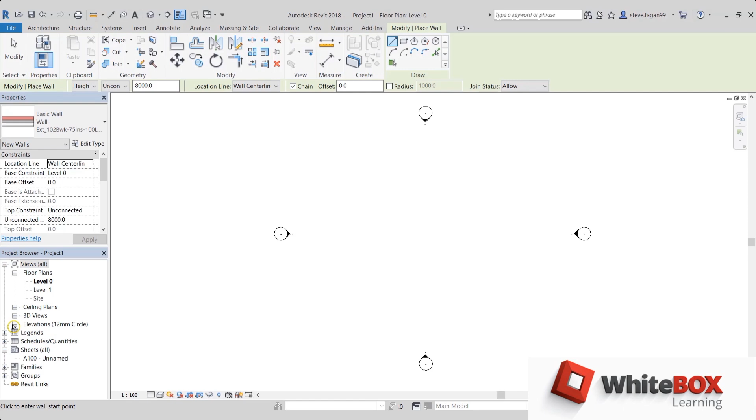We must then specify which level the wall is going to be constrained to. So at the moment we only have level 0 as our base constraint, and level 1 is our next level up. So to get a good view of what I'm about to do, I'm going to open up an elevation view. In the project browser we have our elevations heading. If we click on the expansion button there, we have our east elevation. So if we double click on that, that opens up our east elevation.

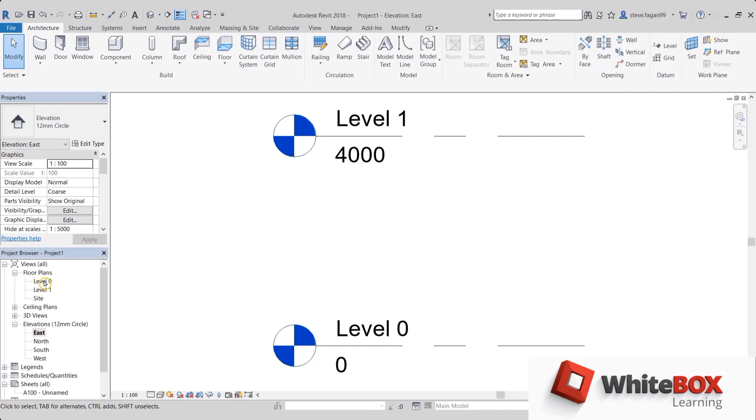Here we have our level 0, which we see in our floor plans, and our level 1, again, it's in our floor plans in the project browser. So if we go back to our level 0, I would like to have both of those views open at the same time. So in order to do that, I'm going to type in WT, which stands for window tile, and by doing that it's going to open up both views on the screen. So type in WT.

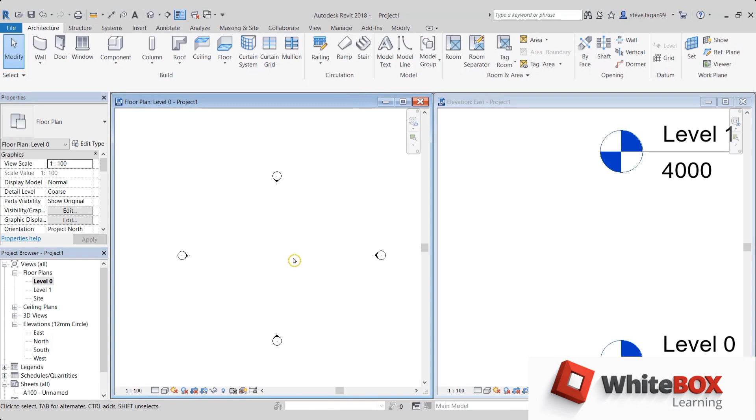Here on the left hand side we have our floor plan level 0, and on the right hand side we have our east elevation. So making sure that our level 0 is active, by simply clicking on the tile, we'll now go back to the wall tool. I'm going to be using my draw by line from the draw panel, and now getting onto the options bar. So the first option here, it says height. It may say depth on yours, but if I hit the drop down arrow, we can go between the two.

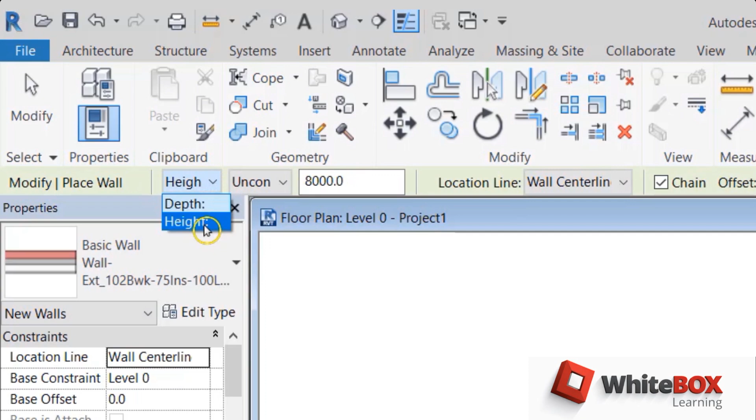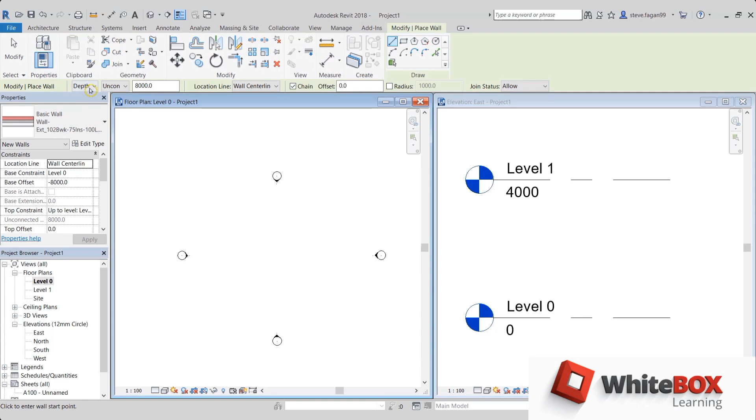So whether we draw by height or by depth simply means that as we're drawing currently on level 0, if I have height selected, my base level will be constrained to level 0, so my wall will go above level 0 and connect to level 1. If I change over to depth, my wall will be constrained at level 0 and go below my level 0. So that's the difference between the height and the depth. Next, once we've specified that, we're going to use height.

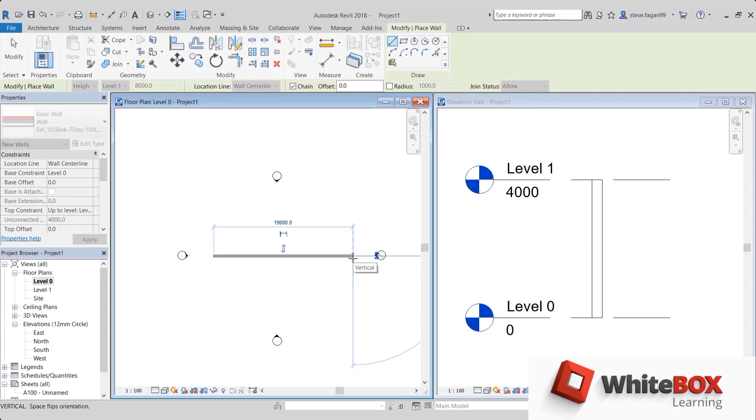We'll then select the next option, which is where we want to constrain it to. So we're currently on level 0, so our next level is level 1. So we constrain it to level 1, and draw our wall. There you'll see on the right hand side in our east elevation, our wall's base constraint is level 0 and its top constraint is level 1. If I go to my east elevation, select my level, and change the level, the wall, because it's been constrained to that level, will move with the level.

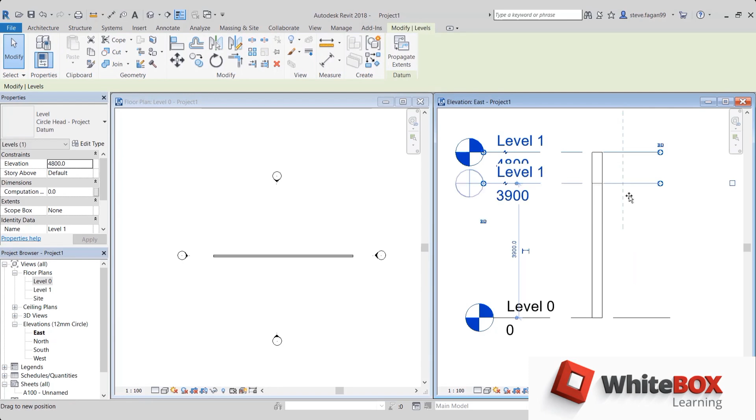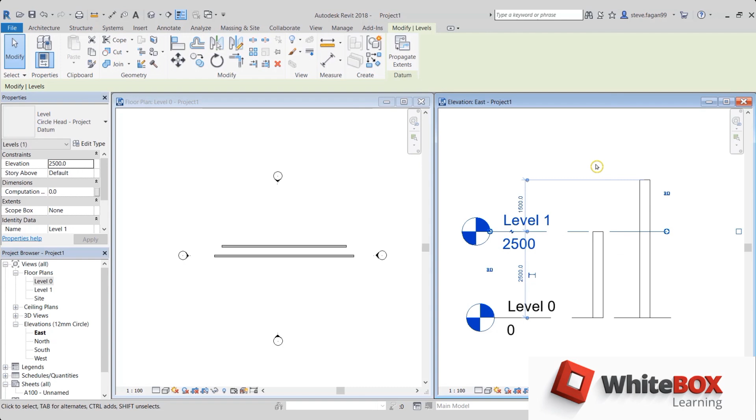If I select unconnected, I'm then able to specify a height. So if I give this a height of 4000 and draw my wall, you'll notice on the east elevation there's my wall, base constraint level 0, unconnected with a height of 4000. So if I change my first floor level, because the wall is not constrained to that level, the height doesn't change. So now we just want to have our level 0 open. If we double tap on the top of the window tile, it'll bring us back into our level 0.

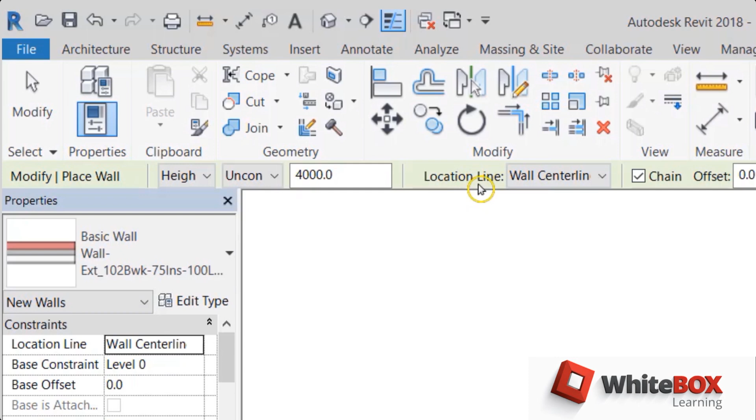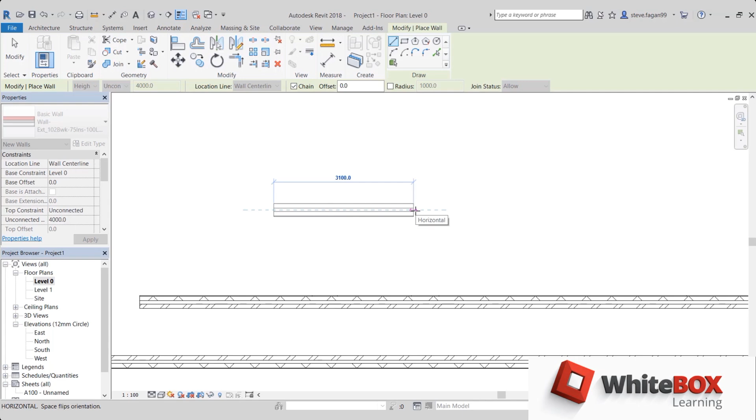For the next option, which is the location line, I'm going to change my detail level to medium. So come down here to the view controls and select medium. If we hit the drop down arrow, you can see we have 6 different options. With the first, which is the wall center line, I'm going to zoom in using my scroll wheel. When I click to start and move my cursor in the direction I want to draw my wall, you'll notice in the center there's a dashed light blue line. That is my location line. And as it's set to wall center line, it's at the center point of that wall.

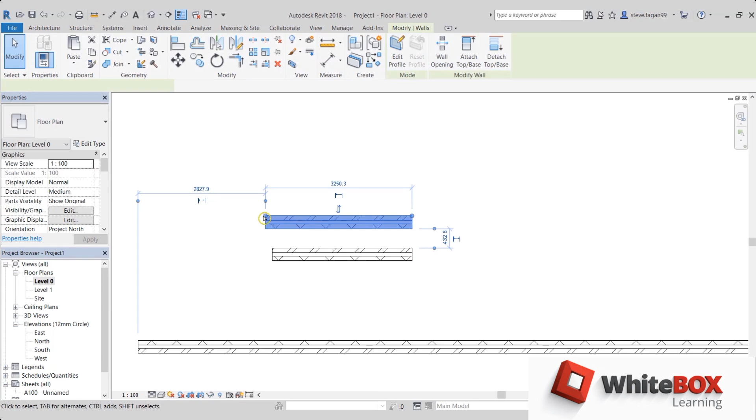It's also represented by the blue grips either side. So if I change it to finish face exterior, when I draw my wall, the dashed blue line is on the outer face of my wall, again represented by the blue grips either side.

As well, we have finish face interior. So there's our dashed blue line on the inner face, so it's running along the plasterboard of the wall. Again, blue grips either side.

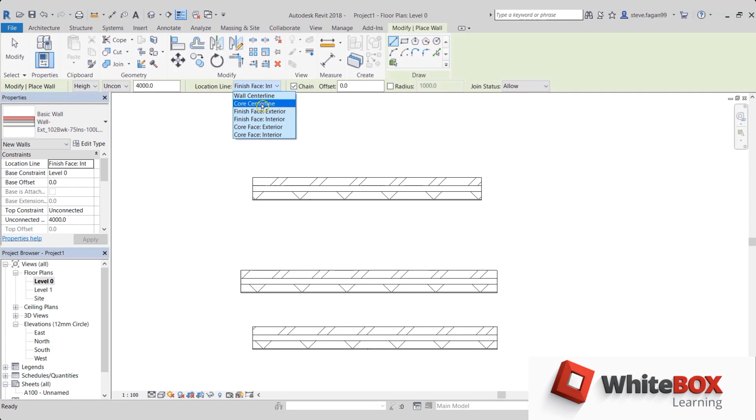The other options which we have are core centerline, core face exterior, and core face interior. What they're referring to as the core is when we create a wall, we must specify what the core of that wall is. The core is generally the structural part of your component. So the blockwork here would be the core of our wall.

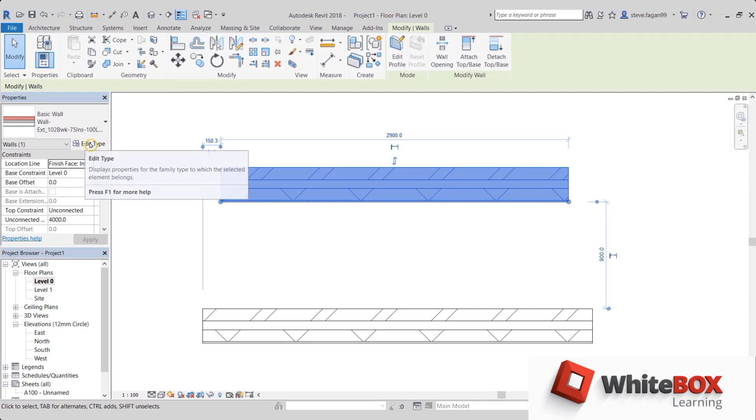To show you how that's represented, I'm going to select it. I'm going to go to Edit Type and edit the structure and show preview. Don't worry about what I've just done. We'll go into a lot more detail about this in a later video. But for now, I'm just going to show you this as a small preview so you have a better understanding about what a core boundary is.

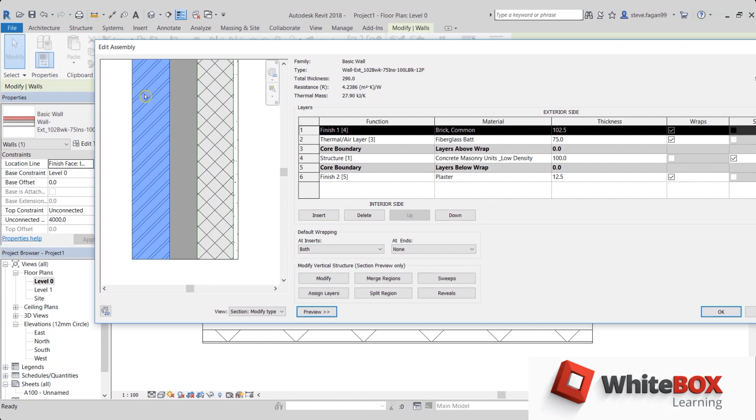So here is a section view of the wall which has been created. There's our brickwork, which is represented here. Next is the insulation. There's our concrete block and our plasterboard finish. And you'll notice on either side of our concrete block, we have our core boundaries. So this here is our exterior core boundary, this blue line here. And here's our internal core boundary, which is this blue line here.

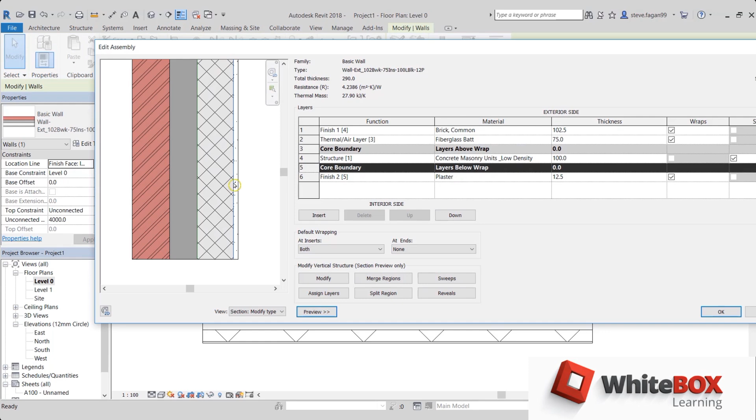So the purpose of creating the core boundaries is when we have two intersecting walls, you'll notice that the blockwork joins together, ignoring the brickwork. So the blockwork will cut right through the brick as well as the insulation. So all components have been created in this manner.

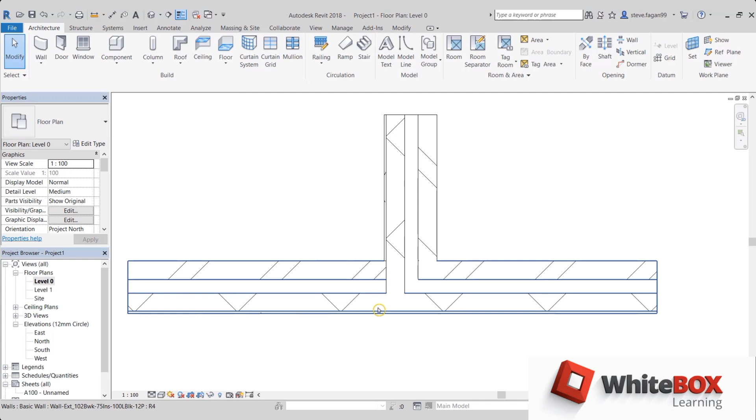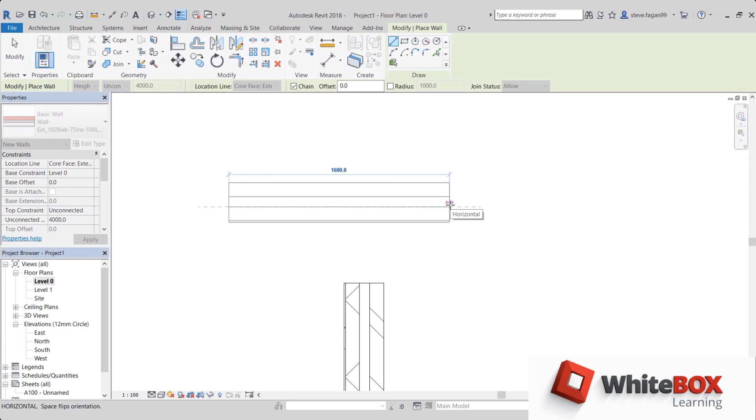So when we go to draw a wall and we change our location line to the core center line, when I place my wall, you'll notice that the dashed blue line is in the center point of that blockwork. So it's in between those two core points. And we have core face exterior again. When I draw the wall, you notice my location line is on the external face of the blockwork. And we have the internal face of the blockwork.

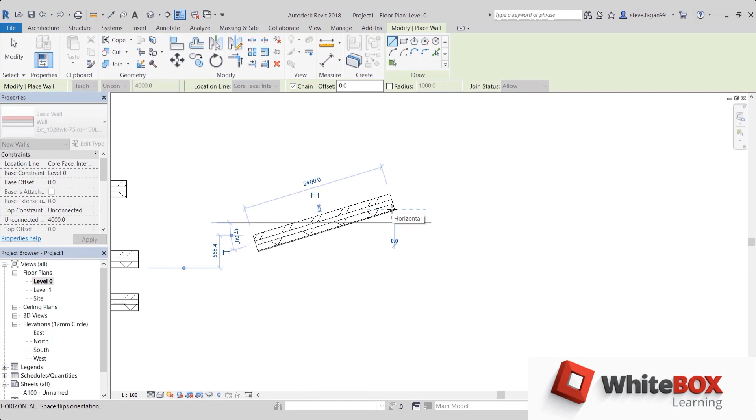Our next option is chain. When we draw by line, having the chain feature turned on, when we click our start point and then our finish point, we'll automatically start a new line segment. So this is known as a chain. If I turn chain off, when I draw a line segment, that is a singular line segment and it will not continue as a chain.

Next option is the offset. I'm going to change my location line to finish face interior. So when I draw my wall, that dashed blue line is on the face of the plasterboard. When I attach an offset, so I'll change my offset to 1000, then when I draw my wall, you'll notice that there's my dashed blue line, which would be on the face of the plasterboard. And my wall is now offset up by 1000.

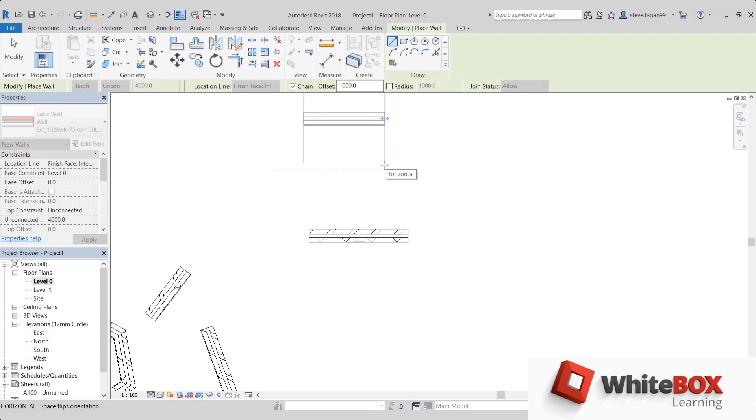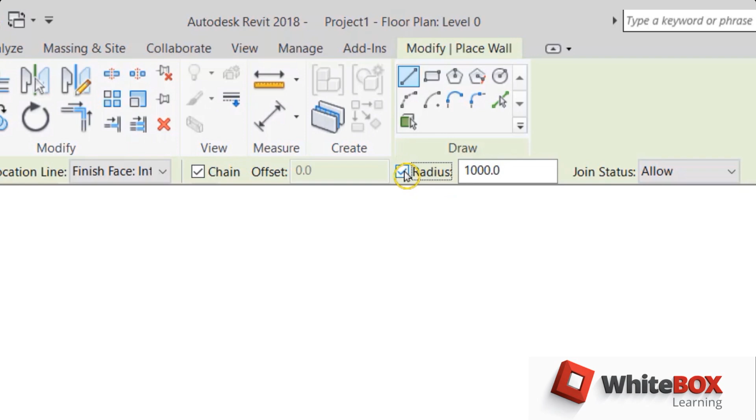If the wall is in the incorrect location and you wanted to flip it to the other side of the location line, press the space bar to flip the wall to the other side of the location line. Next is the radius. So when it's turned on, we have a radius specified. When we draw two intersecting walls, it will generate a radius between those two intersecting walls.

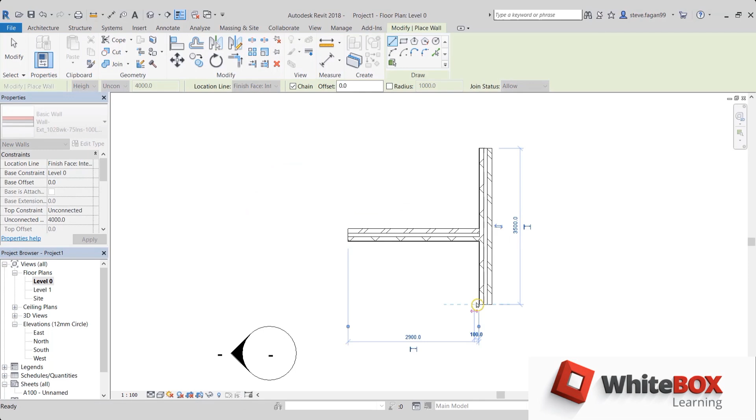And lastly is join status. So when we draw two intersecting walls, they'll automatically join and the core boundaries will meet. If we have join status on disallow, when we do the same, the walls do not join, so the core boundaries do not meet.

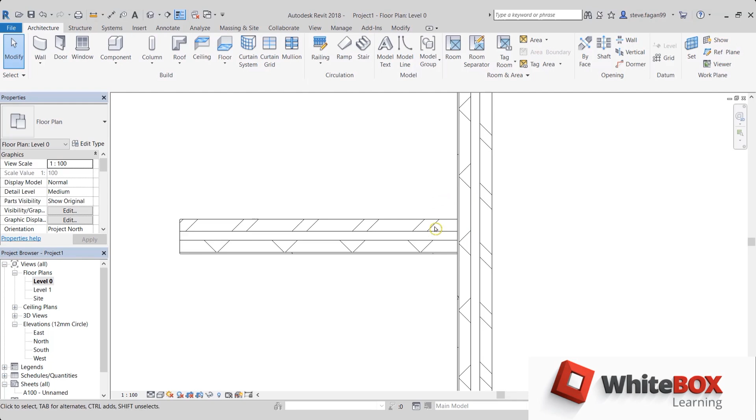If you wanted the walls to join, simply select the wall and you'll notice this symbol here. That symbol is your join symbol. So once you click on that, the walls will then join together.